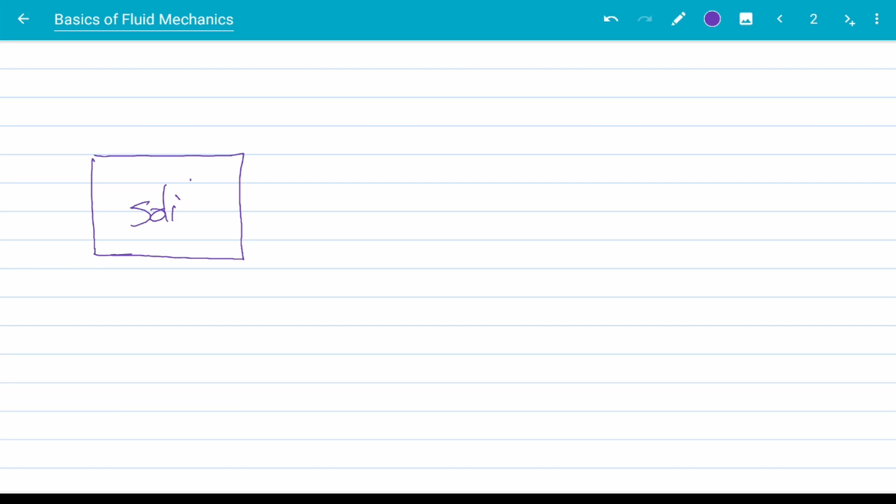Let me show that with a drawing here. So let's say this is an element of a solid, and this is another element, this time of a fluid. I'm going to apply the same shear stress on both of these two elements.

For the solid, obviously under the effects of this shear stress, we will experience some sort of deformation, right? So the solid element maybe changes to this red shape. After the deformation is done, the solid stops deforming any further and just stays like that, as long as tau, the shear stress we're applying on the solid, is smaller than the yield stress. The solid will not deform any further.

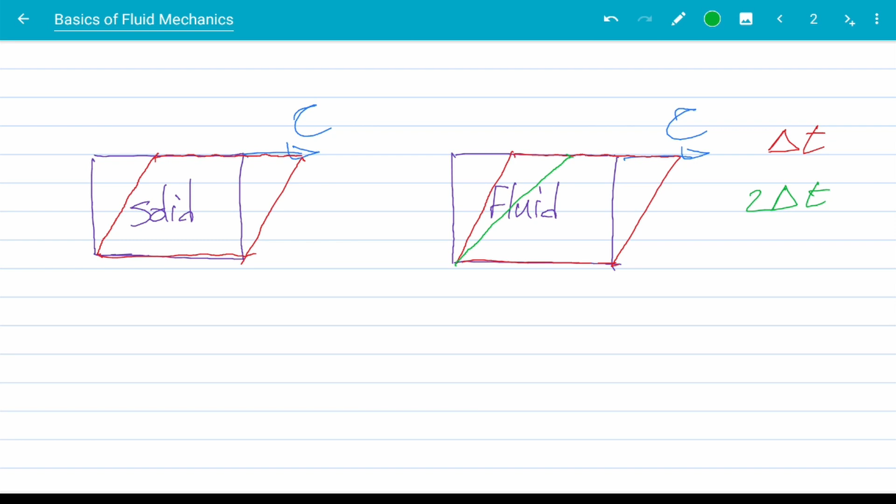However, for the fluid, that's not the case. Under any shear stress, no matter the magnitude, the deformation continues. What I mean is that after maybe a time interval of delta t, the fluid element deforms to this red element. After time passes about 2 delta t, deformation continues to this green shape. And after 3 delta t has passed, the deformation keeps continuing to the orange one.

So as you can see, the deformation continues under the effects of shear stress for the fluid, while for the solid, the deformation stops. This is the main difference between a solid and a fluid: fluid keeps deforming under shear stress, while solid does not. For this reason, solids are usually called elastic, while fluids are usually called viscous.

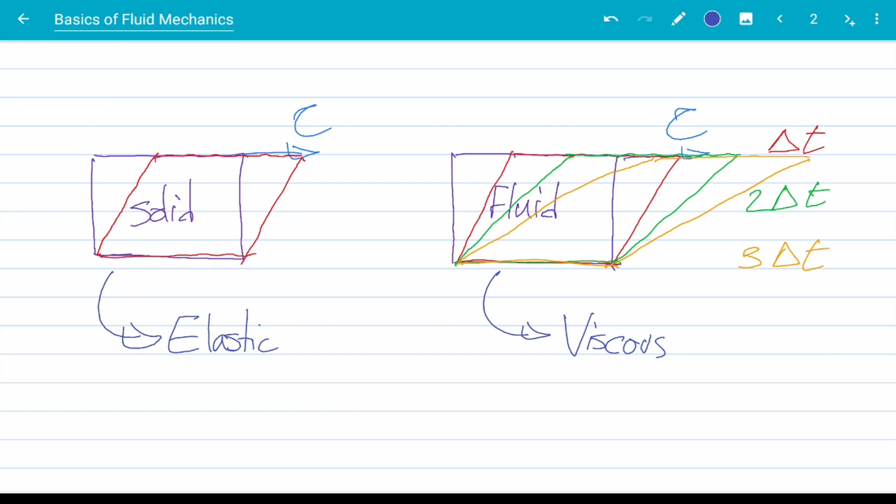Another major difference between solids and fluids is the way we treat them with different equations and concepts. For example, a very famous equation that governs the balance of forces on any object is Newton's second law: the sum of all forces in vector form is equal to the mass of the object times the acceleration vector. Applying this equation on a solid is relatively straightforward, and that is what we do in subjects like dynamics and the design of machineries.

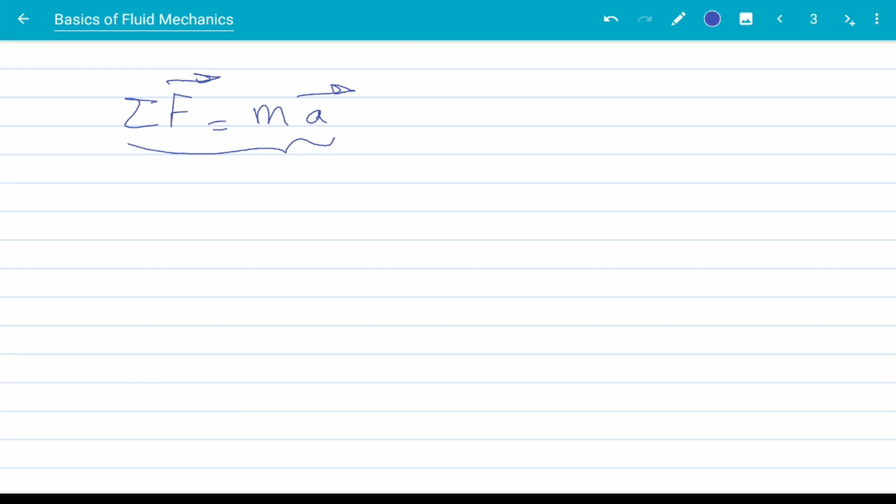However, applying this equation in this form on fluid particles is actually impossible. If you think about it, when you have a flow, let's say inside a pipe, there are numerous fluid particles moving through this pipe. So if you want to apply Newton's second law on each individual particle, you will end up with a very complex system of equations. In order to bypass this issue, we are going to change the way we apply this equation in fluid mechanics.

Instead of following each particle individually using Newton's second law, we are going to set aside a defined geometry in space, like this green rectangle that I'm drawing here. We call this a control volume. We are not concerned with the motion of individual particles; we are concerned with the motion of the flow inside the green rectangle. So this is a new approach.

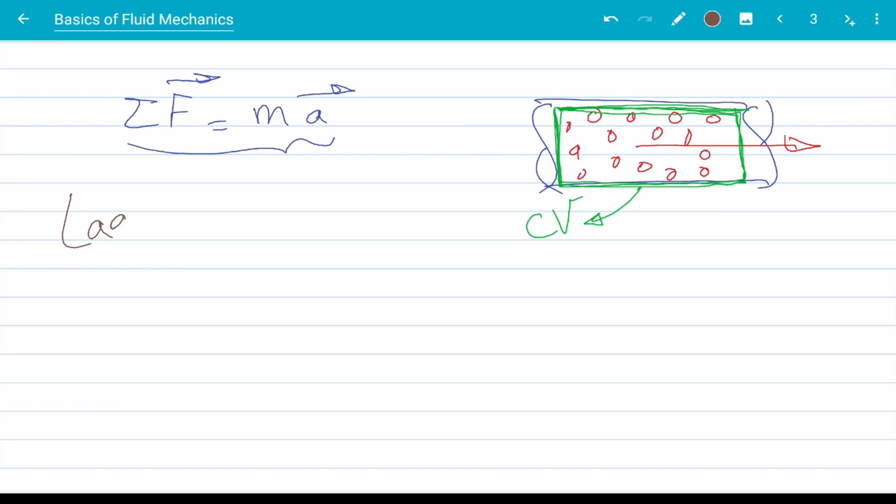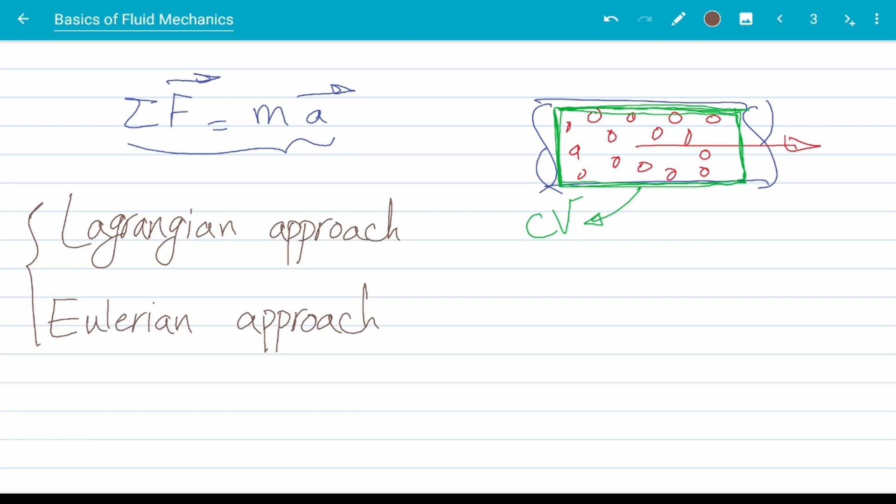The other approach, following the motion of individual particles, the approach generally used in solid mechanics, is usually referred to as the Lagrangian approach. The new approach for fluid mechanics, where we are concerned about the motion inside a defined geometry in space, is usually referred to as the Eulerian approach. We are going to discuss the Eulerian approach in future videos. For now, I just wanted to introduce the concept and the difference between Lagrangian and Eulerian approaches.

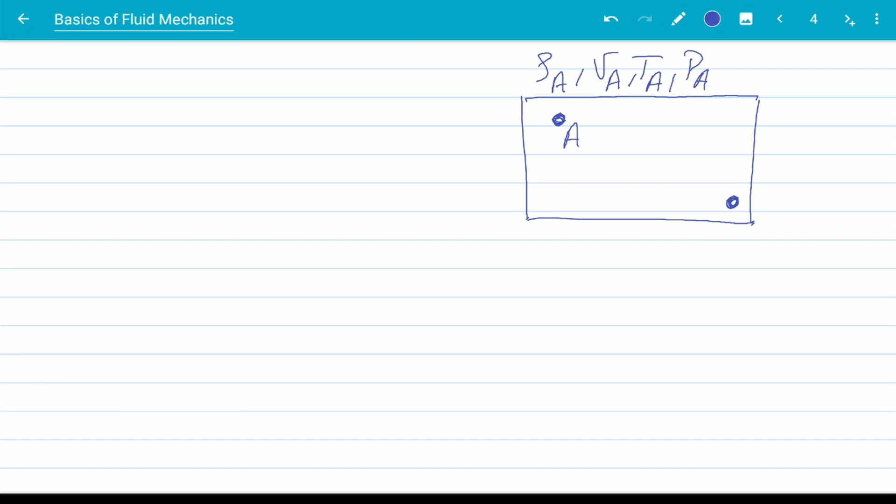Now, in a control volume, generally speaking, flow and fluid properties can be different at different locations. For example, at this location, let's call it point A, we will have the density, velocity, temperature, and pressure of point A. And at another point in the same control volume, let's call it point B, we may have density, velocity, temperature, and pressure that are different from point A.

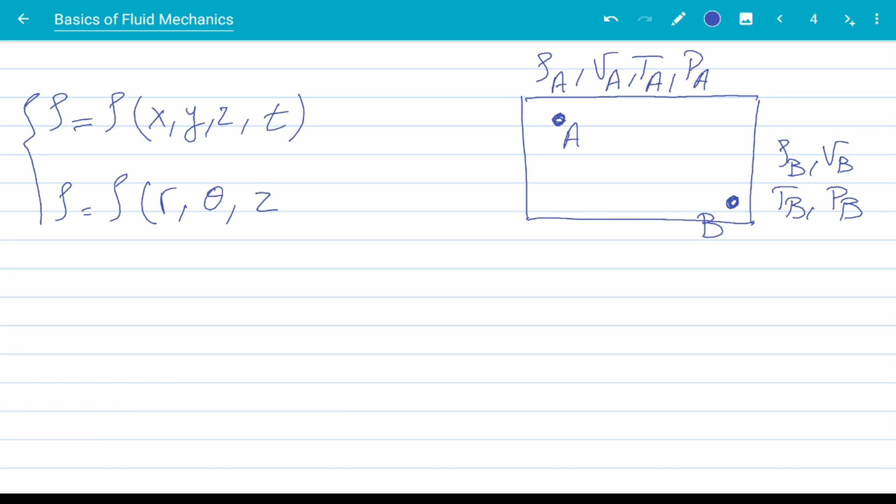So generally speaking, the flow properties can be a function of location as well as time. For example, the density of the fluid is a function of x, y, z, and time, where x, y, z represent the 3 dimensions in a Cartesian coordinate system. If you are using a cylindrical coordinate system instead, then density is a function of r, theta, z, and time.

Now that I mentioned density, let's talk about it. Density is defined as mass per volume. The unit for density in SI units is kilogram per meters cubed. In British Imperial units, it is pounds per cubic feet.

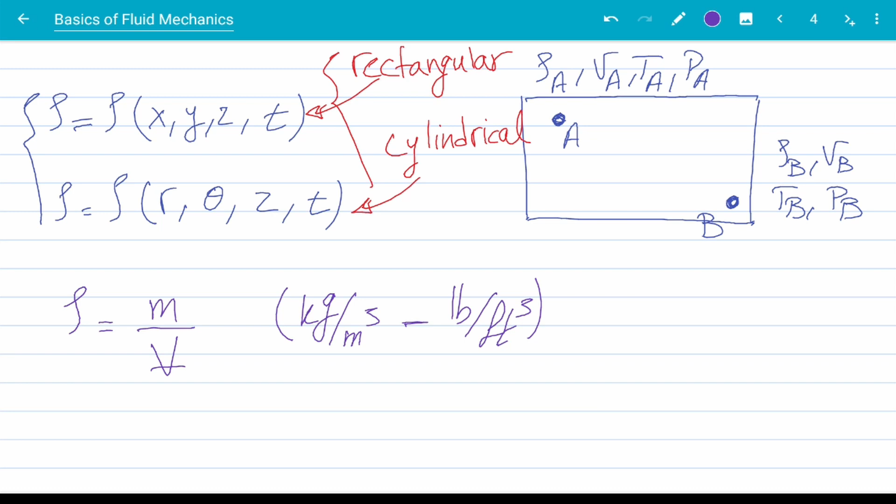There is a traditional way of representing density of different fluids and materials in general, and that is showing the density based on the density of water. It is called the specific gravity, and we show it with SG. It is the ratio of the density of the material that we are talking about over the density of water.

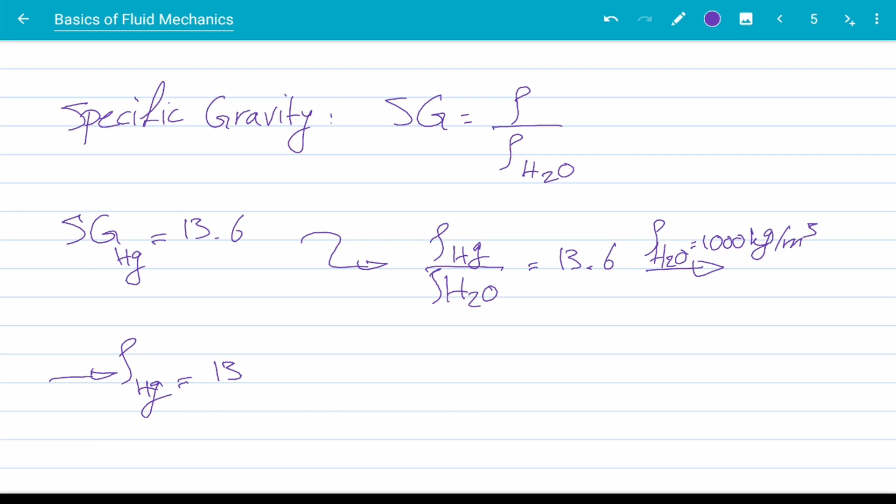So, for example, SG of mercury is 13.6. What it means is that density of mercury over density of water is 13.6. Now, in standard conditions, room temperature and pressure of 1 atmosphere, the density of water is 1,000 kilograms per meters cube. That means density of mercury is 13,600 kilograms per meters cube. That's how you use specific gravity.

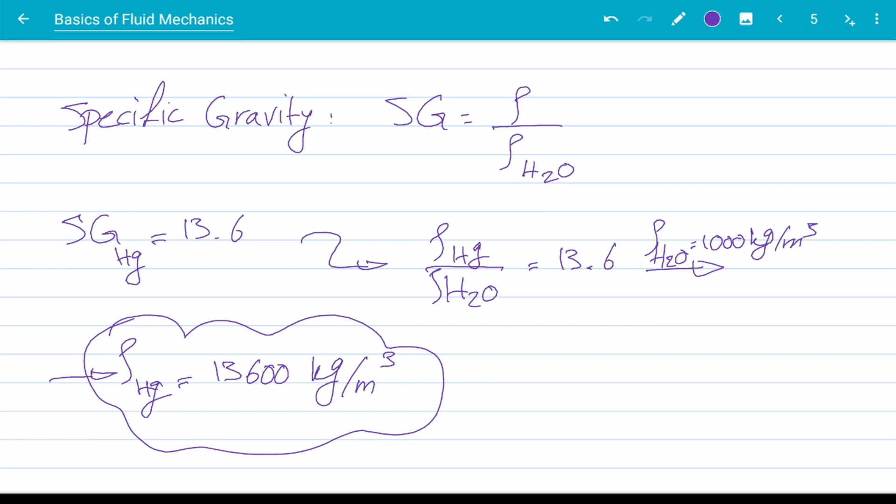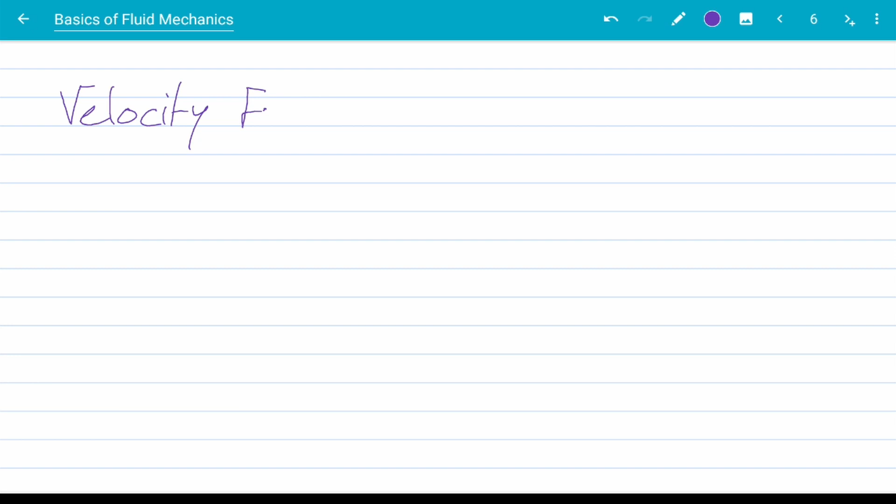Now, after density, the other flow property that is very important is the velocity. So we need to define the velocity field. Now again, just like density, velocity in general is a function of x, y, z, and time. Now, please take note that unlike density, that was a scalar, velocity is a vector.

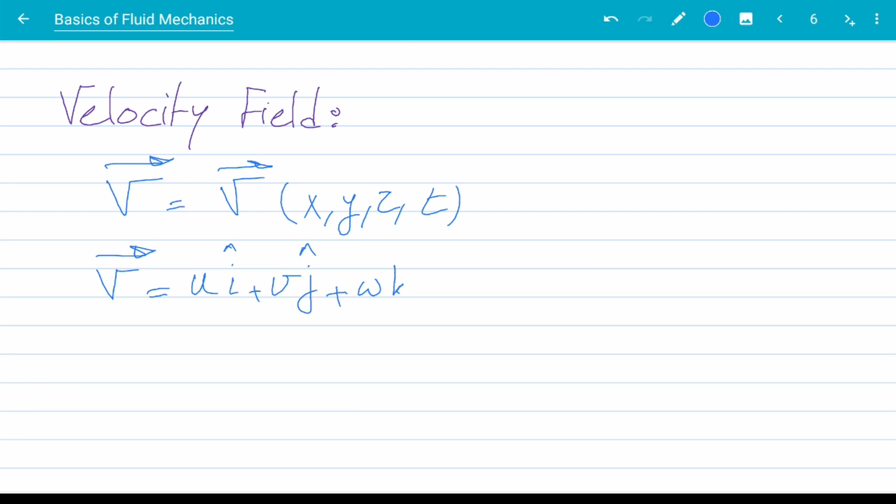Now, when dealing with vectors, it is immediately known that we can write down the vector in its component form. So, for a rectangular coordinate system, I can write down the velocity vector in the form of its i, j, and k components. So I will have u, i, plus small letter v, j, plus small letter w, k. Now i, j, and k in this equation represent the unit vectors along x, y, and z axis.

And small letter u, small letter v, and small letter w represent components of the velocity in x, y, and z directions. Now, using u for the velocity component in x direction, v in y direction, and w in z direction is kind of like a general universal agreement in all of the fluid mechanics textbooks. So everywhere you go, when you see u, you can be certain that u is along the x-axis. Small letter v is always the velocity component along the y-axis, and w is the velocity component in the z direction.

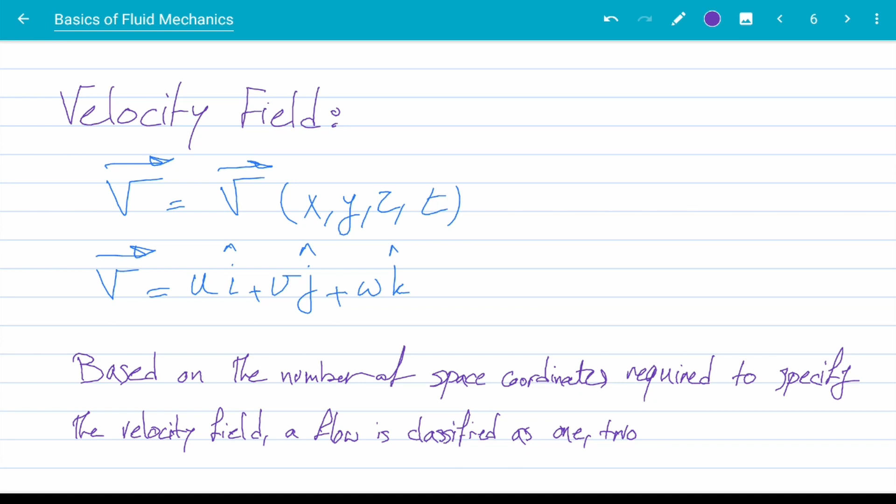Now, based on the number of space coordinates required to specify the velocity field, a flow is classified as 1, 2, or 3-dimensional. Now, generally speaking, all flows are 3D, right? But analysis based on fewer dimensions is always appreciated, okay?

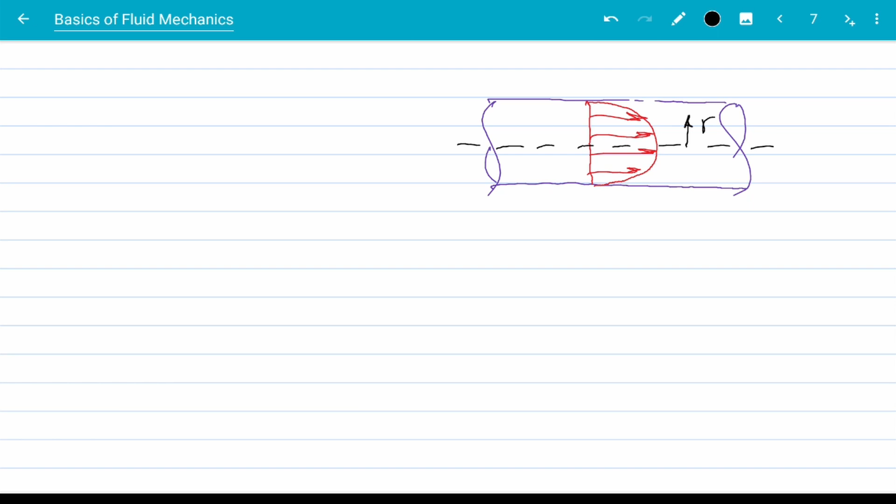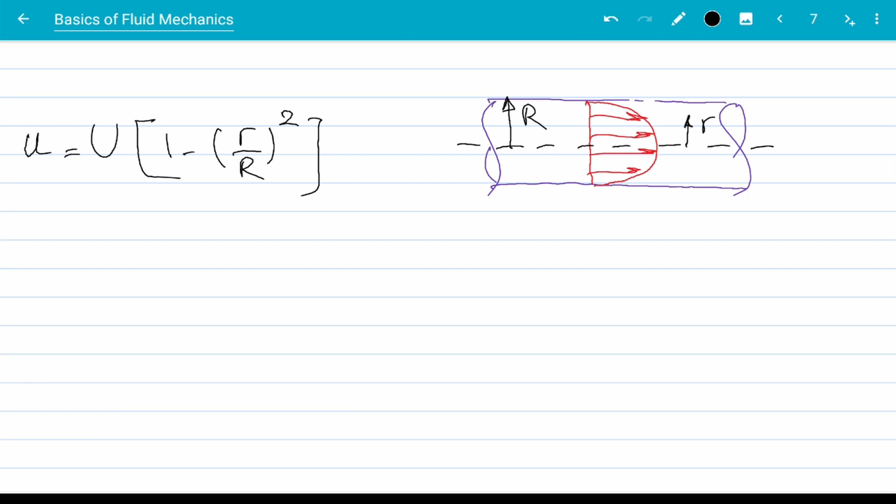Now, if we are using the cylindrical coordinate system and this direction is the r direction and the radius of the pipe is capital letter R, then the velocity is defined as capital letter U times 1 minus small letter r over capital letter R squared. Now, in this equation, the capital letter U is just a constant. Capital letter R is the radius of the pipe, so it's constant as well. The only variable here is small letter r.

So I can conclude that u is a function of r only. So my velocity component, my velocity profile, has only one space coordinate. I only need one space coordinate, r, to define the velocity field. This means that this flow field is one-dimensional.

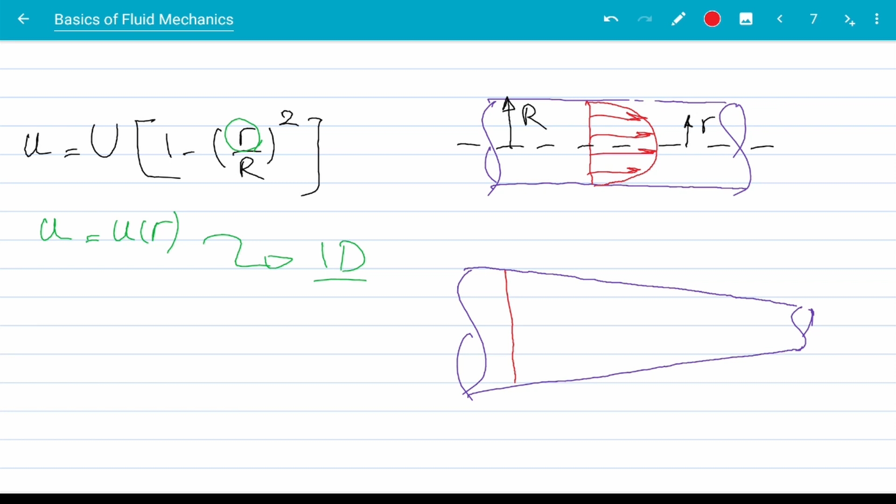Now let's assume another situation where we are dealing with a pipe. However, the cross-section of the pipe is shrinking, more like a cone. So the velocity profile at the beginning of this cone looks like this. And the velocity profile near the end of the cone looks like this. As you can see, the velocity profile has changed in the x direction as well as r direction.

Again, we are using the cylindrical coordinate system. This direction is r, this direction is x. I can see that u is a function of r, obviously, as you move in the r direction from the center line to the edges of this pipe, the velocity profile changes. So it's a function of r.

And also, it is a function of x as well, because it is kind of obvious here. At the entrance of this cone, the velocity profile is kind of broad and wide. And as you go closer near the tip of the cone, the velocity profile is shrinking.

So velocity field is a function of x as well, which means this flow is two-dimensional. Take note that in these two examples, we are dealing with a velocity field that has only one velocity component, namely the velocity in the x direction. That's why we call it u. We are not dealing with v or w. These flows do not have v or w components.

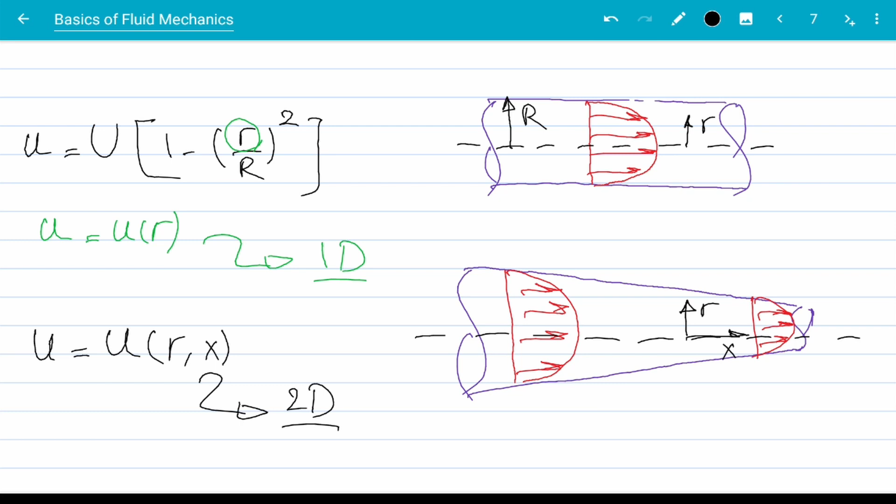However, especially for the bottom example, because that single velocity component is a function of r and x, it is at the same time a two-dimensional flow, despite the fact that only one velocity component is present. So when trying to define the dimension of a velocity field, don't concentrate on the number of velocity components, concentrate on the number of space coordinates that are required to define your velocity field.

Now we talked about the dependency on space coordinates, but what about the dependency on time? As mentioned for the definition of density and velocity, both of these are, generally speaking, functions of space coordinates as well as time. Again, in general, every flow property - I'll just use x here to show that it can be any flow property - is a function of x, y, z, and time, generally speaking.

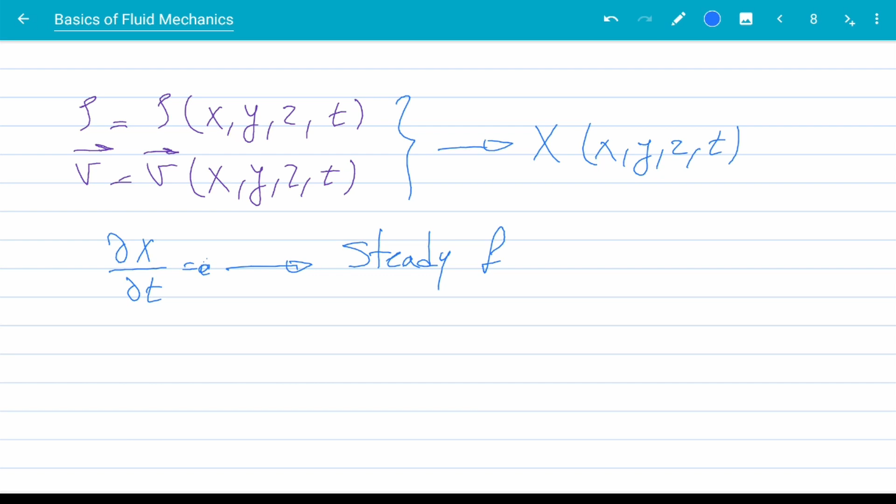Now, if the flow properties are not changing with time, or in other words, mathematically speaking, the derivative of the flow property with respect to time is 0, then I can conclude that the flow is independent of time, or in other words, is steady. If, however, the flow properties are changing with time, we can conclude that the flow is unsteady, sometimes referred to as transient.

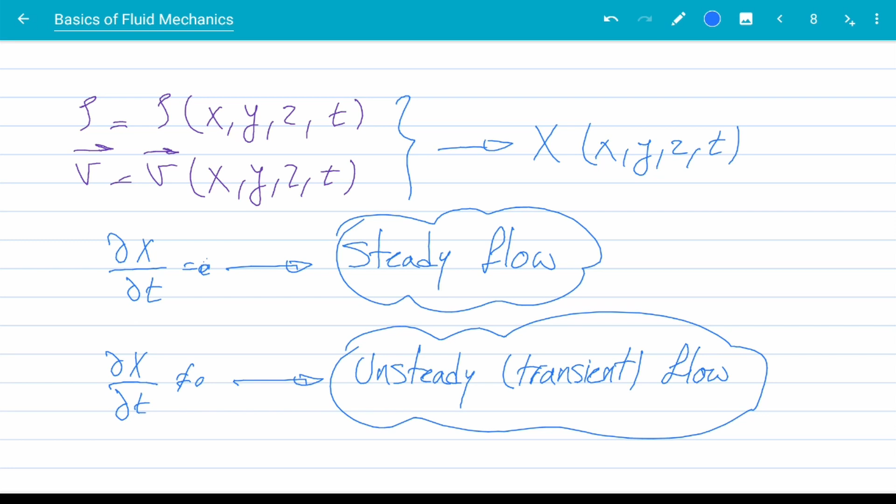The dependency on time and spatial coordinates are independent from each other. We can have a scenario where velocity is a function of x and time, a scenario where velocity is a function of time only, or a scenario where velocity is a function of spatial coordinates alone and not time. So there is no correlation between the dependency on time and spatial coordinates. They are independent from each other, independent variables, and they don't affect each other.

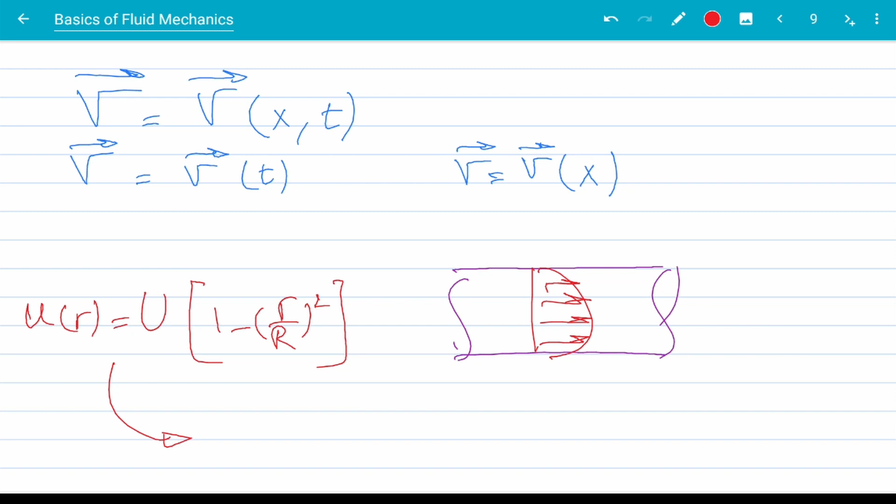So in the previous example that we had, the flow in the pipe, I presented this equation as the velocity inside the pipe. As you can see, there is no time involved in this function. Obviously, you can conclude that the velocity inside the pipe governed by this equation is a steady flow, meaning that flow properties are not affected by time.

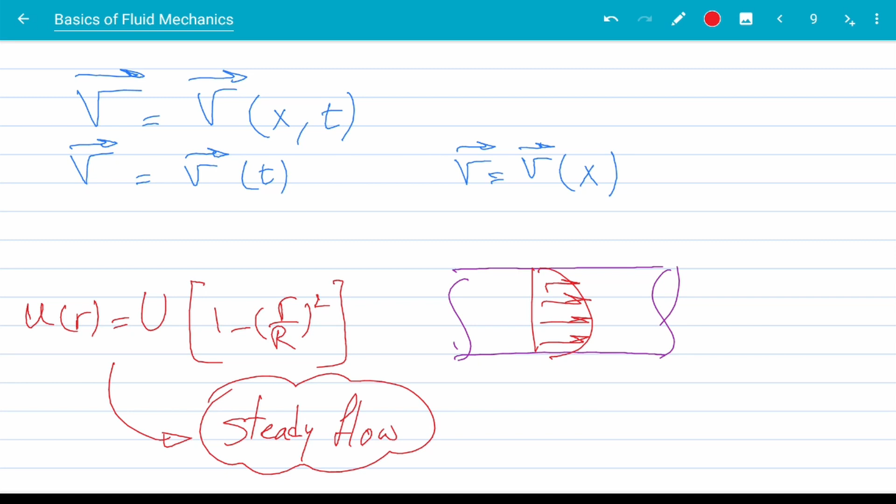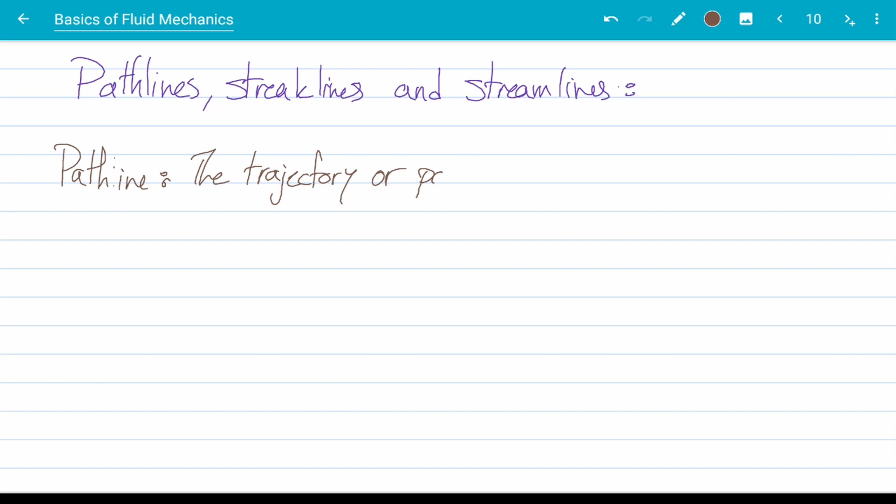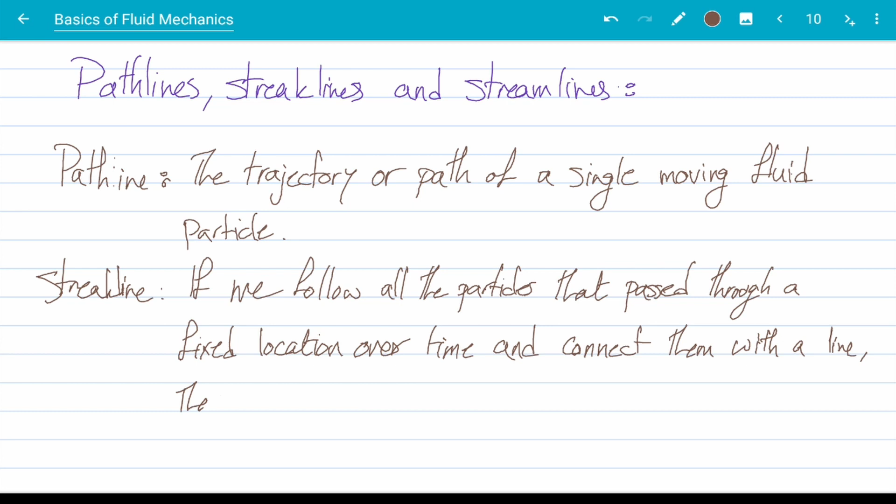Now we can talk about our next topic: path lines, streak lines, and streamlines. A path line is the trajectory or path of a single moving fluid particle. If we follow all the particles that pass through a fixed location over a certain time frame, and then connect these together, the line that we get is called a streak line. Finally, a streamline is a tangent line to the direction of the flow at every point in the flow field at any given time.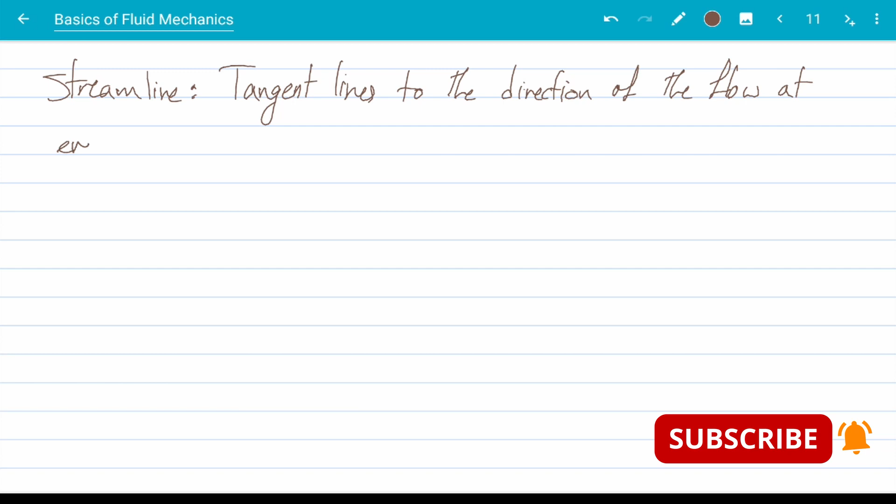Now, the video here shows a path line, streak line, and streamline at the same time. This is a transient flow. We can think of it as the wind blowing initially towards the east, or the right-hand side of the x-axis, and over time it gradually shifts its direction towards the north. So at the end of this animation, the direction of the wind is towards the northeast.

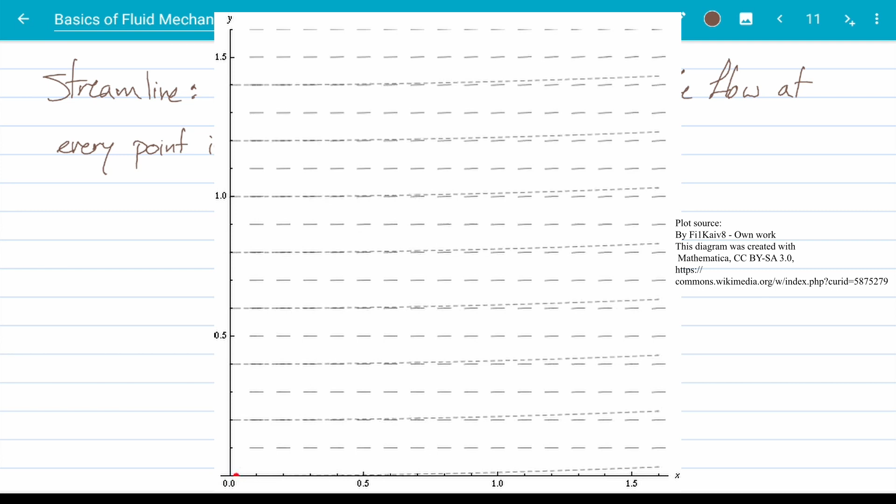Now imagine that at the center of this coordinate system we have a pile of particles - think of them as maybe tree leaves on the street. We are going to gradually release these particles into the flow, and we have attached a GPS to each so that we can track them in the wind. The red line here is the path of a single particle, or leaf. It initially starts to move towards the right, and gradually as the wind shifts direction, it also shifts direction towards the north, going through a curvature. So the red line is a path line because it's following a single leaf.

Now, we are gradually releasing all the leaves into this wind. At any given time during this video, if we pause and connect the GPS locations of all these particles together, we get the blue line. So the blue line here is the streak line. It shows the location of all the particles that originated from the center of this coordinate system inside this flow field. As you can see, the blue line is not following the red line, because generally speaking, streak lines and path lines are not the same.

The gray dashed lines in this video represent the streamlines. They are always tangent to the direction of the velocity of the flow. This is a transient flow, so initially they are all parallel with the x-axis, meaning the flow is going right, or the wind is blowing east. Over time, they start to shift direction towards northeast. At any given time, these dashed lines show you the tangent lines, or streamlines, inside our velocity field.

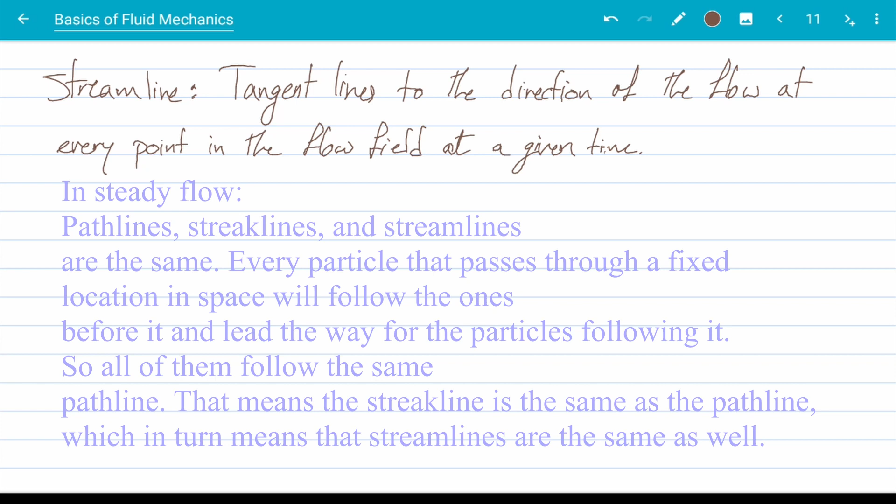Because if the flow is steady and there is no change with time, a single particle that originates from any point in space will go through the same path as any other particle that originated from the same location. There is no change with respect to time, so all particles will follow each other and go through the same path line. If you connect them at any given time, the streak line will also fall on the path line. And because this is a steady flow, not dependent on time, the streamlines also fall on the path line. So all three are the same.

So to summarize, in a steady flow, the path line, streak line, and streamline are the same. In an unsteady flow, they are different.

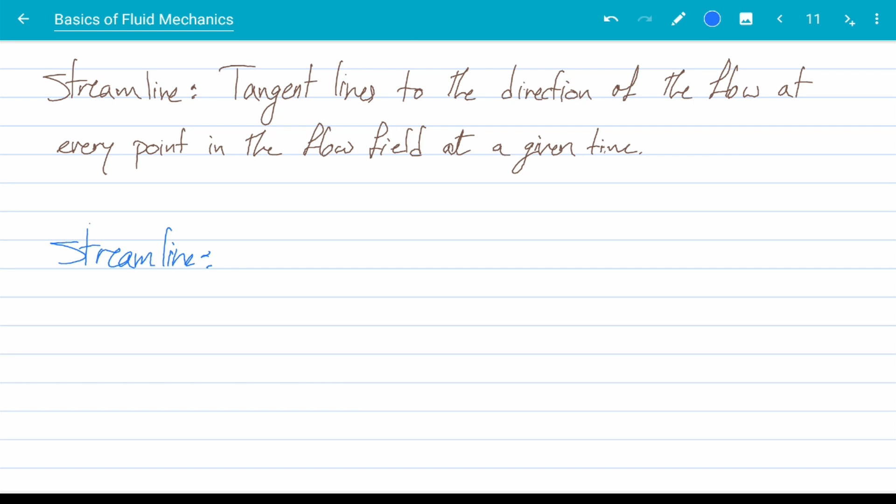By the definition of a streamline, we are looking for a tangent line that is always tangent to the direction of the flow in a velocity field. So let's see what we can do with that definition. Let's say we have a flow field, and at a point inside my velocity field I have this velocity vector. Now let's see if we can find a tangent line to this vector. Let's say this is the line we are looking for. I want to find a mathematical equation for this green line.

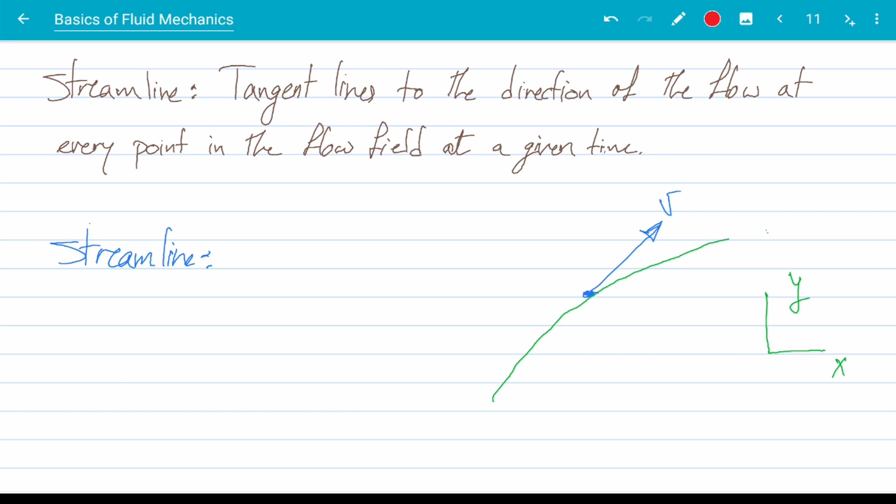I'm using the rectangular coordinate system, x and y. So basically what I want to do is find the slope of this blue vector. I have two ways of achieving that. First, I can break this vector into its components, u and v. Finding the slope means finding this angle here, let's call it alpha. So the tangent of alpha is v over u.

Now, if you take a look at the green line, and I ask you, if this green line has a function y equals y of x, tell me what the slope is at this blue point, what would you do? You would say that the tangent of alpha, or the slope there, is dy over dx. Now I have two definitions for the tangent of the same angle. I can equate them: dy over dx equals v over u. I can rearrange this equation and say dy over v is equal to dx over u. This equation relates the velocity components u and v to the streamline.

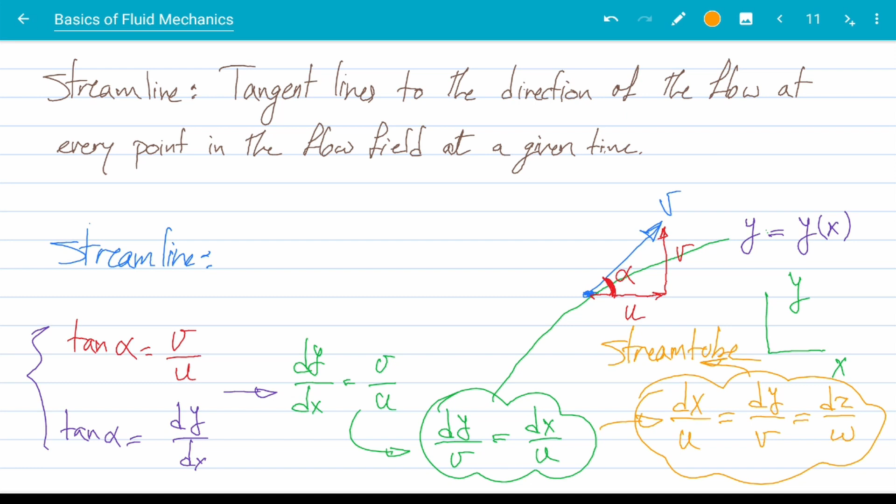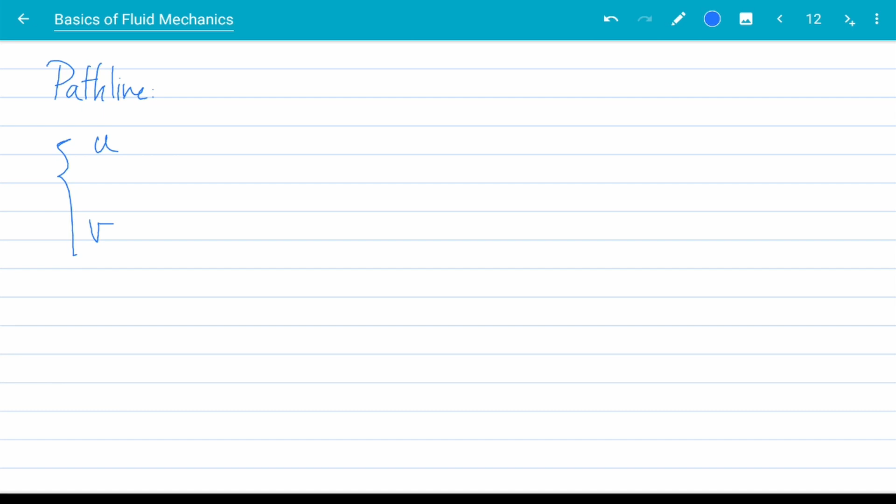We can do a little mathematical analysis for the path line as well. The path line, by definition, is the trajectory of a single particle. So I can say the velocity of the single particle has two components, u and v, since we're talking two dimensions here. By definition, u is the derivative of x with respect to time, and v is the derivative of y with respect to time. So playing with both of these equations, I can express x as a general function of time, the x of the particle.

This is a Lagrangian approach because we are following a single particle now. X as a function of time is the integral of u dt from the start of the motion up to t star, which is the time that we are interested in. Same thing goes for y: y as a function of t is the integral from the initial time to t star of v dt.

Now again, finding the path line, these two integral equations are the ones that we generally use to find a path line of a single particle. And again, these are the equations that CFD post-processing softwares, like Tecplot, usually use to generate a path line.

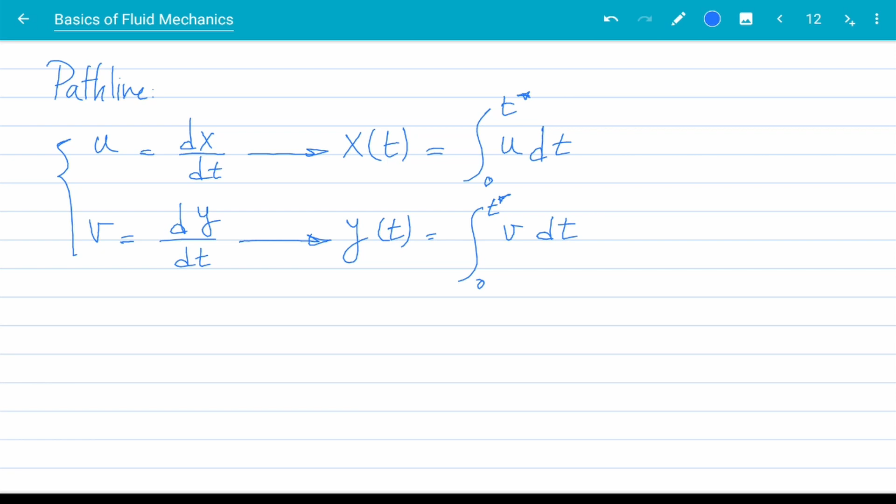Now, streak line, on the other hand, because of its definition, is very easy to visualize using a wind tunnel and using smoke or dye, injecting some dye into the fluid. As I said, it's very easy to visualize. However, it's more tricky to actually find an equation analytically, so I'm not even trying to do that right now. Path line and streamline in equation form are enough for now.

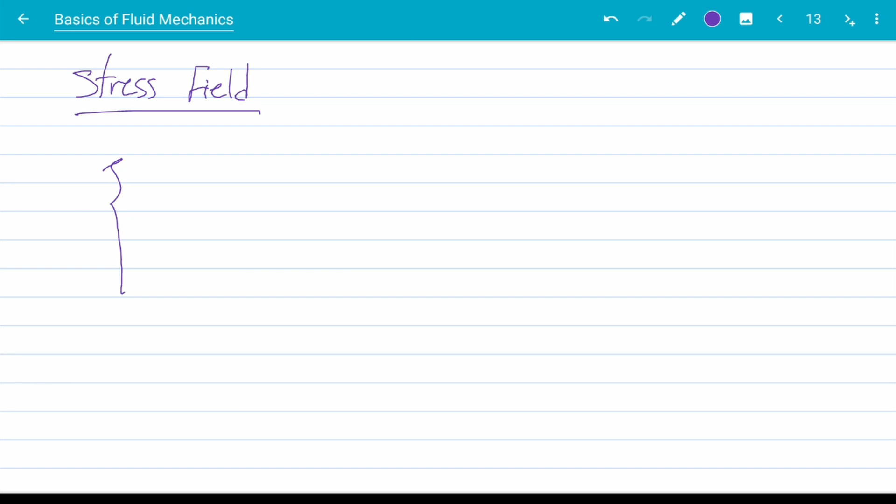All right, so now we can talk about the stress field. When analyzing a fluid flow, we really need to know the different forces acting on our fluid. Generally speaking, the forces acting on a fluid element or a fluid particle can be categorized into two main groups: surface forces and body forces.

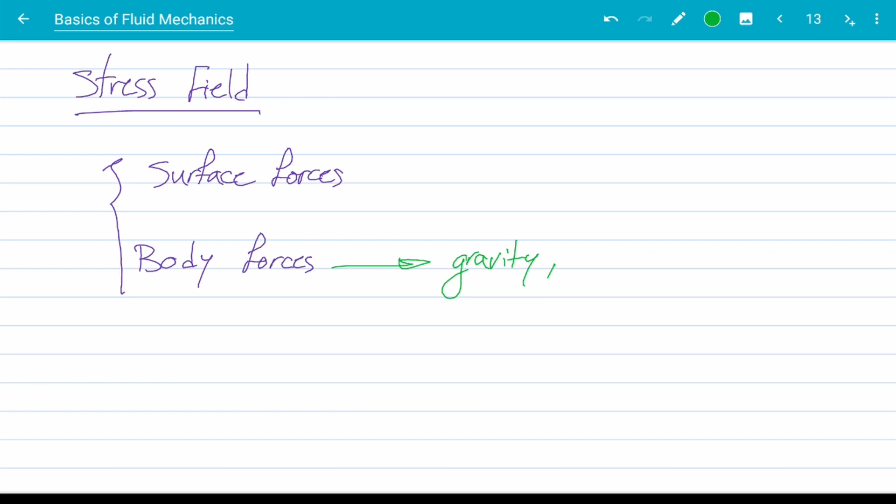Body forces are the ones that affect the bulk or the mass or the volume of a particle, like gravity. Or, if your fluid has electromagnetic properties, applying an electric or a magnetic field on the flow will generate some sort of body forces. So gravity and electromagnetic forces. Keep in mind that in classic fluid mechanics, the applications we usually encounter in general engineering, we are usually dealing with gravity. Electromagnetic is rare, but it depends on your problem. If your flow has electromagnetic properties and there is an electric or magnetic field present, you have to consider that.

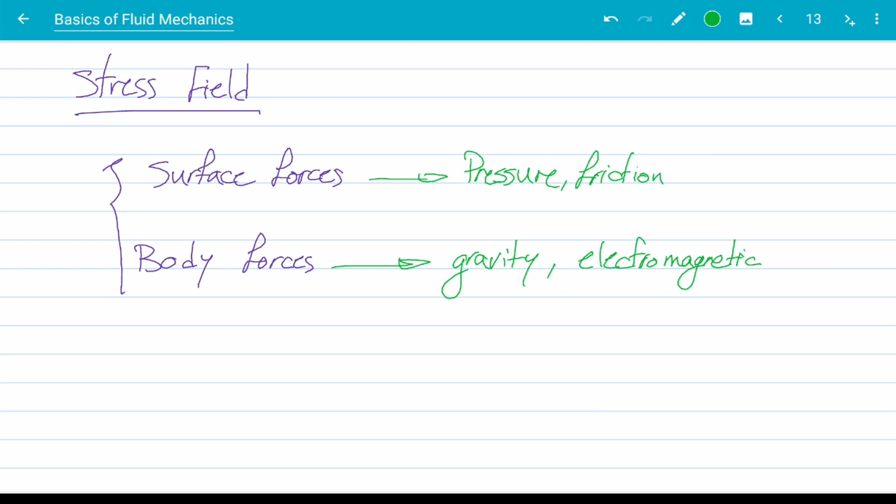Now, anything other than body forces falls into the surface forces category—things like pressure or friction. Any other type of force imaginable that is not a body force is categorized as a surface force. So surface forces lead to stress. This part is just like solid mechanics: when you have a solid element or particle and apply different surface forces on it, depending on the direction of the force, it causes either a normal stress or a shear stress. The same thing happens here in fluid mechanics as well.

So let's take a look. Let's say this is the surface of a fluid or solid particle, and we're interested in this blue element here, which I'll call S. This is just an area. Now, area, generally speaking, is a vector, so I'm going to show S as a vector. It has a unit vector, which I'll show with N, meaning that it's normal to the surface we're interested in. The area's unit vector is always perpendicular to the surface of interest, and always pointing outward from the element.

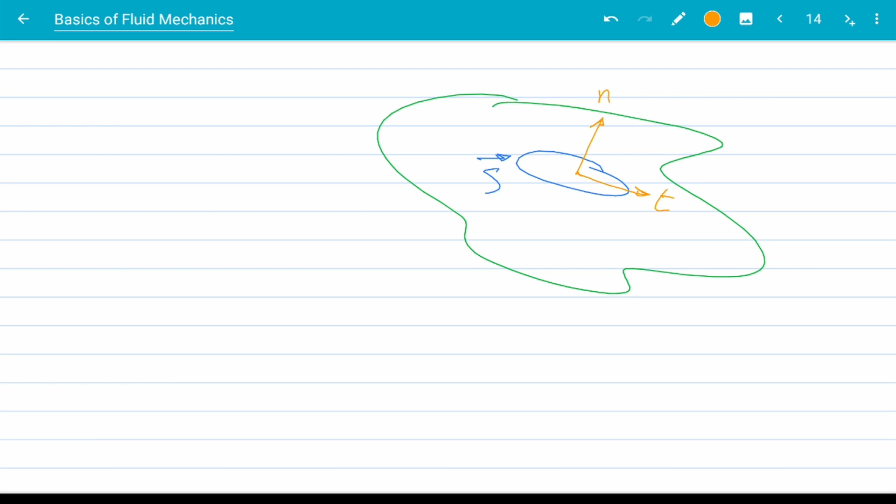For example, if this blue surface we're discussing is on top of the fluid particle, then the orange N is pointing outward. Now, there is an orthogonal vector in the direction of the surface itself, which we show with T. So based on this vector representation, I can say that vector S is S times N, where S is the scalar magnitude of the area, and N represents the normal vector of the surface.

A general surface force vector can be something like this—let's say this is the surface force acting on my element S. I can break this force into N and T components, right? So let's do it: this will be the component in the N direction, and this will be the component in the T direction.

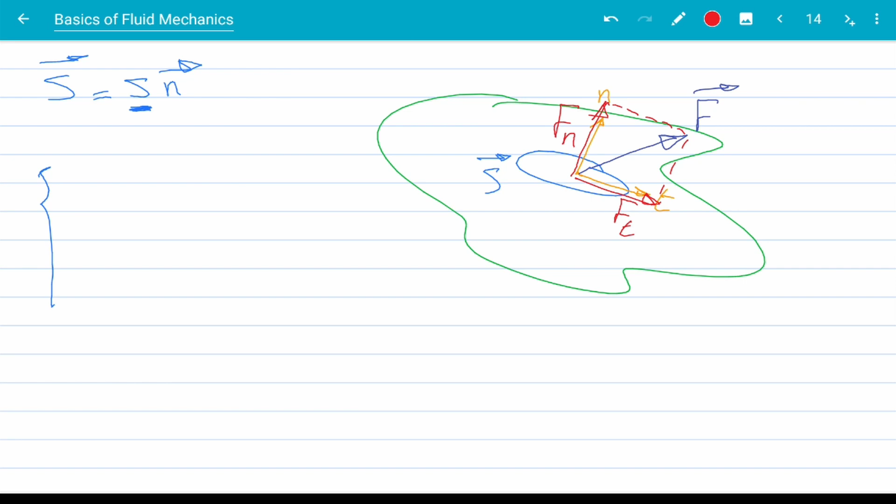Now, based on the definition of normal and shear stress, I can say the normal stress, which we usually show with the Greek letter sigma, in the N direction is Fn over S, the magnitude of the area. And the shear stress, shown with the Greek letter tau, is in the T direction, and it's the force component in the T direction over the area S. Now, the N and T vectors here are not good enough for us.

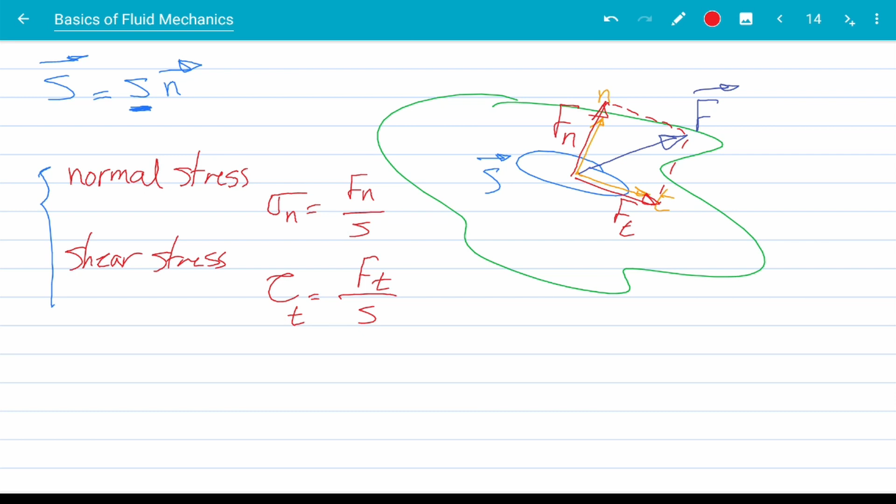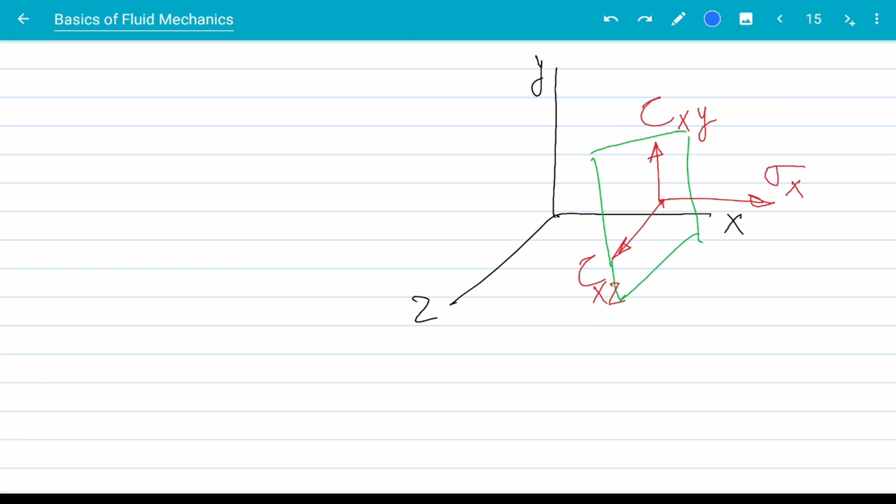Now, sigma t in the previous page was tangential to the surface. We can break that into a y and z component here. I will have one shear stress component in this direction and one in this direction. I'm going to label the top shear stress tau xy and the bottom shear stress tau xz. The naming convention is that the first subscript shows the axis that is normal to that plane. In this example, the x-axis is the normal vector of this green plane, so x comes in as the first subscript. The second subscript is the direction of the shear stress. For the top one, the red arrow is in the direction of the y-axis, so this becomes tau xy. For the bottom one, it's parallel to the z-axis, so it becomes tau xz. This is the naming convention we'll use for different shear stresses on a single particle or element.

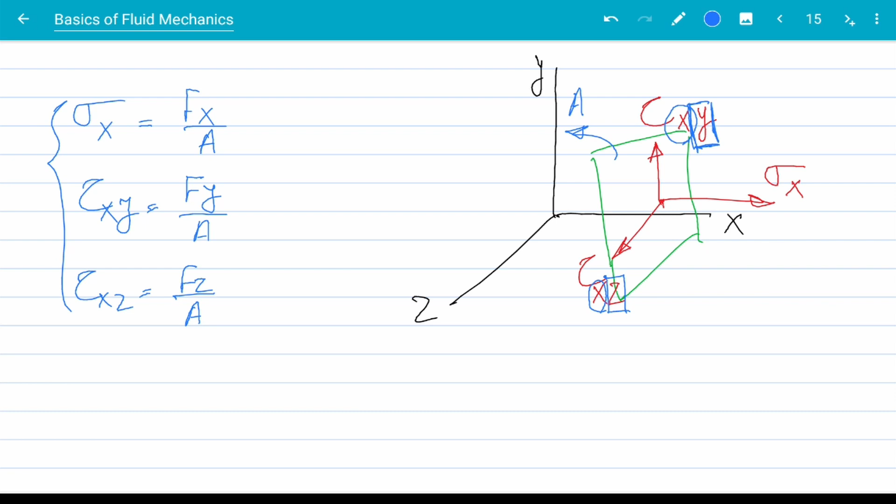Now, if you want to put an equation for these shear stresses, you can say sigma x is fx over the area. Let's say the area of this green plane is just A. Tau xy is fy over A, and tau xz is fz over A. Fx, Fy, and Fz are the three components of the surface force F acting on this particle. Let's say this is F, and so it will have an Fx component here, an Fy component like this, and an Fz component like this.

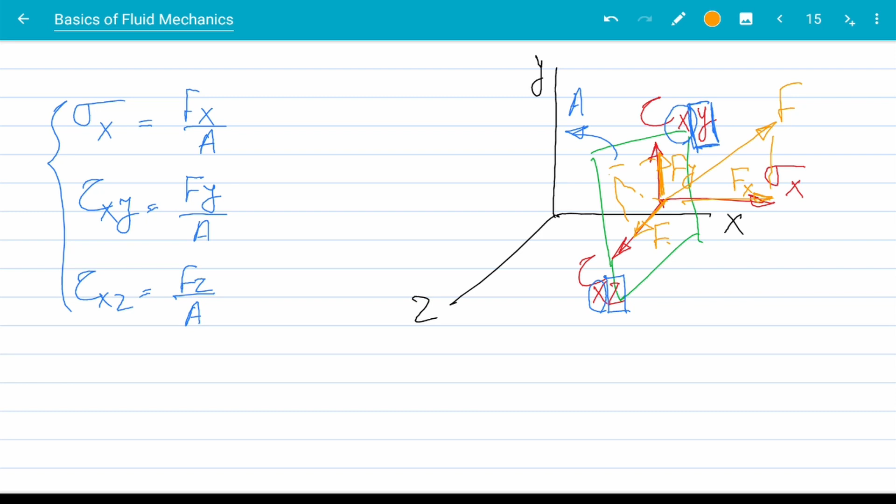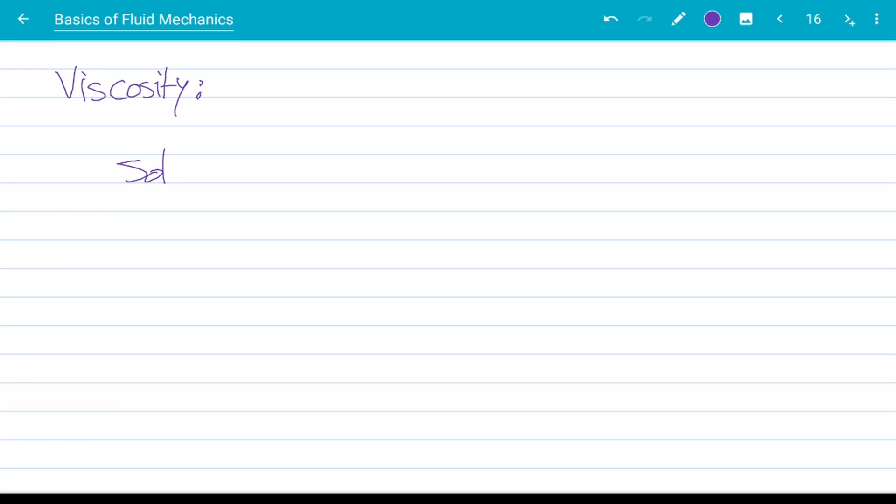Now we can talk about viscosity. At the beginning of this video, when I was talking about the difference between a solid and a fluid, I said that under a certain shear stress value, a solid goes through a deformation while the fluid will continue to deform. For a solid, we know that deformation, that strain, causes the stress. For example, for the solid, the stress is related to the strain through the Young modulus. Here, sigma is the stress, epsilon is the strain, and capital E is the Young modulus. For the fluid, however, this deformation is continuous, so I don't have a value for the deformation in the form of strain to relate the shear stress to the strain. So we are going to relate the stress to the rate of deformation.

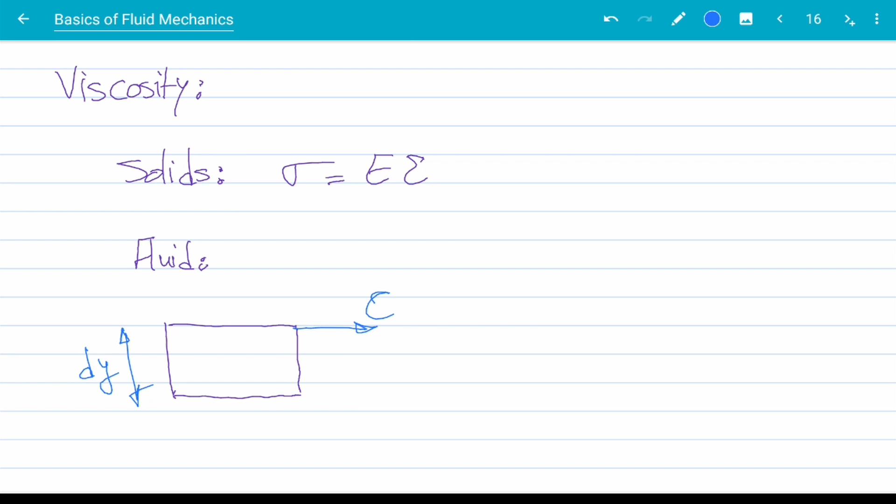Let's take a look. For the fluid, let's say I have this fluid element, and I am going to apply shear stress on top of it, shear stress tau. Now this fluid element is very small, its side is dy. Over a time frame of dt, it has gone through this deformation, this red deformation. I know the deformation is continuous, so I had to constrain it by choosing a finite dt. Over the time dt, this fluid element has deformed from the purple rectangle to the red shape. Now, I'm going to say that the angle created here is alpha, and the rate of deformation of this fluid element is related to it.

Rate of deformation is actually d alpha over dt. Now remember, we want to relate the shear stress to the rate of deformation. I want to find a relation between tau, shear stress, and rate of deformation, d alpha over dt. So my goal is to relate tau to d alpha over dt. Let's see what we can do.

Now, this is the same element. Point A, which was here at t equal to 0, has moved to A prime after dt. I want to know how much A has displaced, so I have two ways of finding that. Way number one is using alpha and dy.

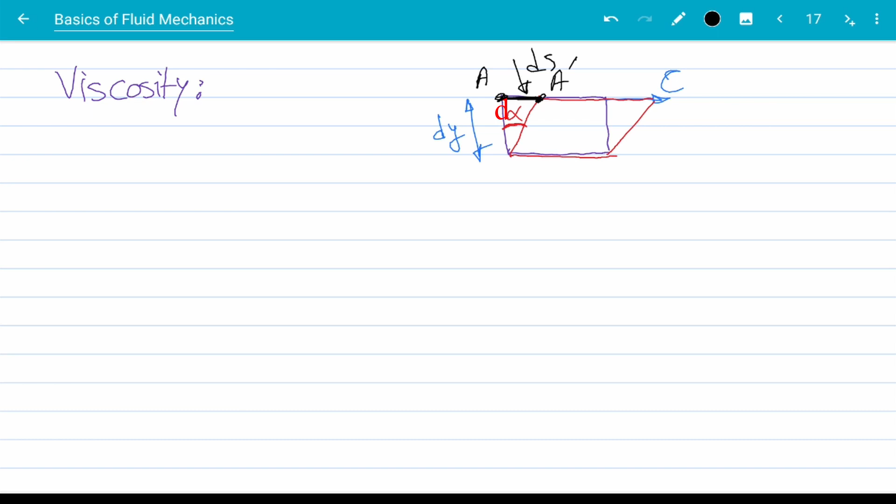Let's say this displacement is ds, so ds is d alpha dy. If the motion is small, if dt is sufficiently small, then this entire deformation is small enough that we can assume that AA prime has moved on an arc where the center is here, I'll call it O. You know that to find the length of an arc, you multiply the angle by the radius. Here, radius is dy and the angle is d alpha.

On the other hand, because of this shear stress, the top layer of this element is moving with a velocity du, so I can find ds using du. The corner of the element has moved from point A to point A prime with a velocity of du over a time frame of dt. So ds is du dt.

Now I have two equations for ds. I can equate them. This gives me d alpha dy is equal to du dt. Playing with this equation a bit, I get d alpha over dt equals du over dy. I knew that tau has a relation with rate of deformation d alpha dt, but d alpha over dt isn't good enough for me because it's not a flow property. However, du over dy is, and I found a relation between d alpha over dt and du over dy. So I use that.

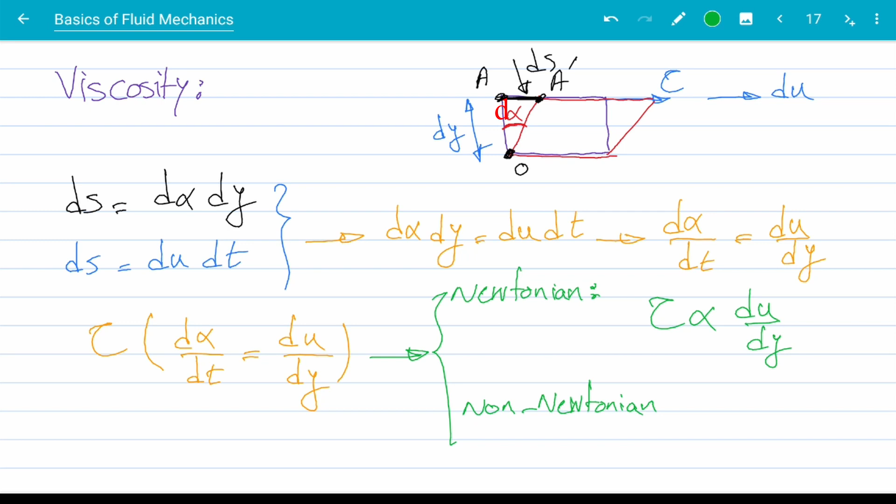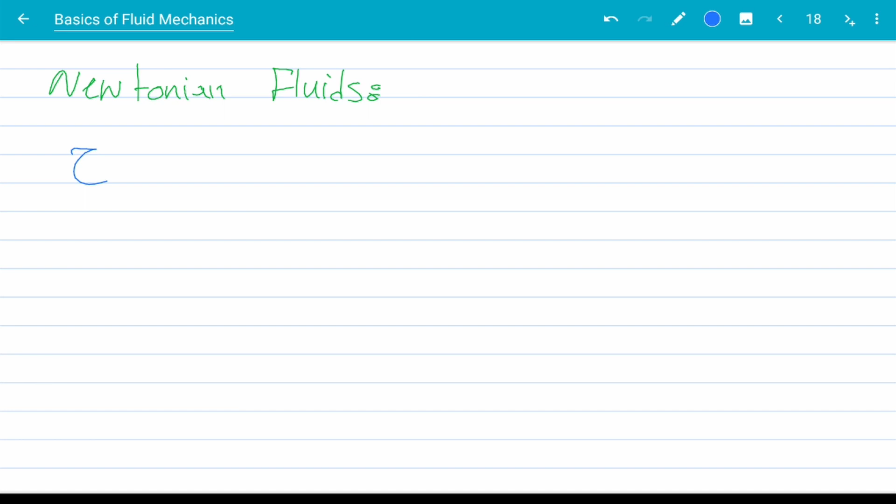Now here, we need to divide fluids into two main categories. Category 1 is called Newtonian fluids, and for Newtonian fluids, tau is linearly proportional to du over dy. For non-Newtonian fluids, the other group, this is not the case - tau is not linearly proportional to du over dy. So let's first focus on Newtonian fluids. Nearly all of the common fluids that we deal with, like water, oil, air, nitrogen, oxygen, any of these common gases and liquids, fall into the Newtonian fluids category. As I said, for Newtonian fluids, tau, or shear stress, is linearly proportional to du over dy.

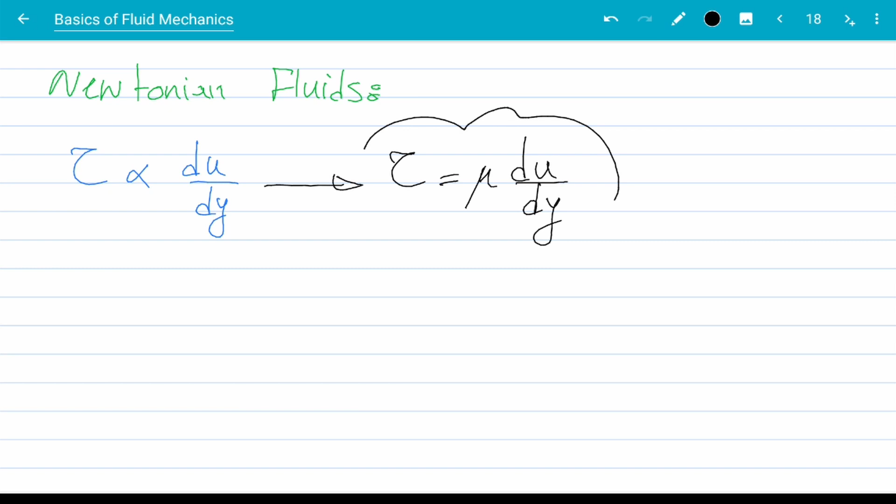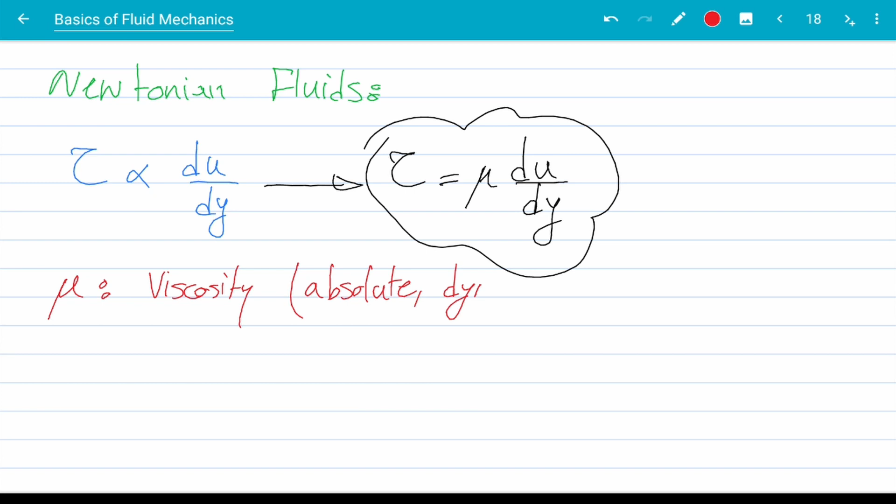Now, the coefficient that makes this proportional relation into an equation is called the viscosity. We say tau is viscosity times du over dy. Mu is called viscosity, sometimes we refer to it as absolute viscosity or dynamic viscosity. Its units in the SI system are Pascal seconds, or kilograms per meter second. We also have nu, which is mu, viscosity, over density, and we refer to it as kinematic viscosity. Its units are meters squared over seconds.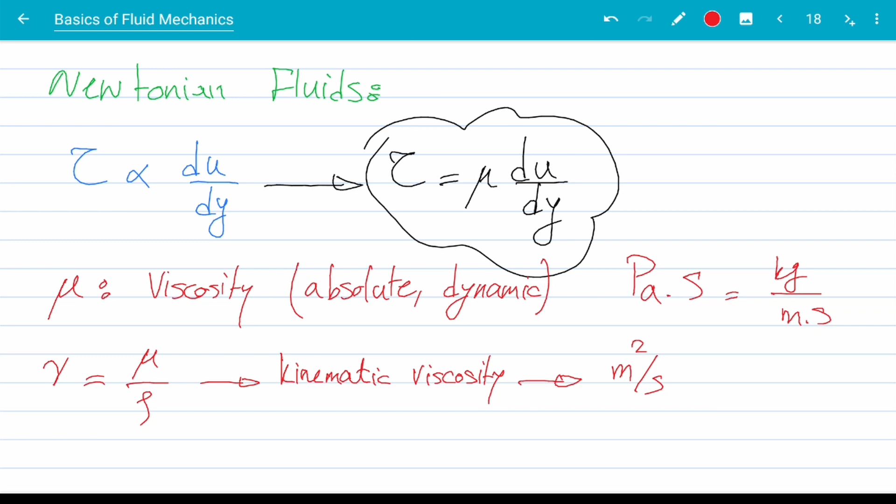Now, both absolute or dynamic viscosity and kinematic viscosity are commonly used in fluid mechanics. Mu and nu are properties of the fluid, and generally they are a function of temperature. If the changes in temperature are negligible, then we can assume that during the flow the viscosity of the fluid remains constant. Now, non-Newtonian fluids are different - here we don't have a linear relation between the shear stress and the rate of deformation. Based on how the shear stress behaves with respect to the rate of deformation, we will have different types of non-Newtonian fluids. Examples of non-Newtonian fluids are things like toothpaste, blood, paint, nail polish, stuff like that.

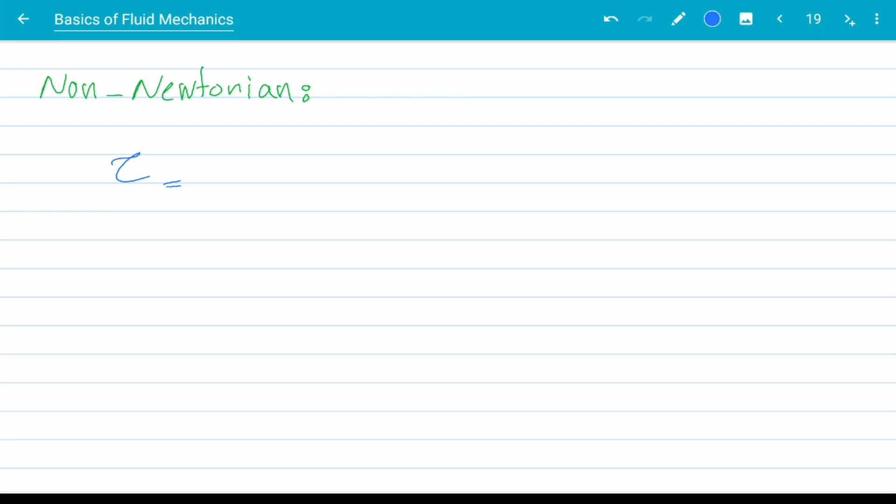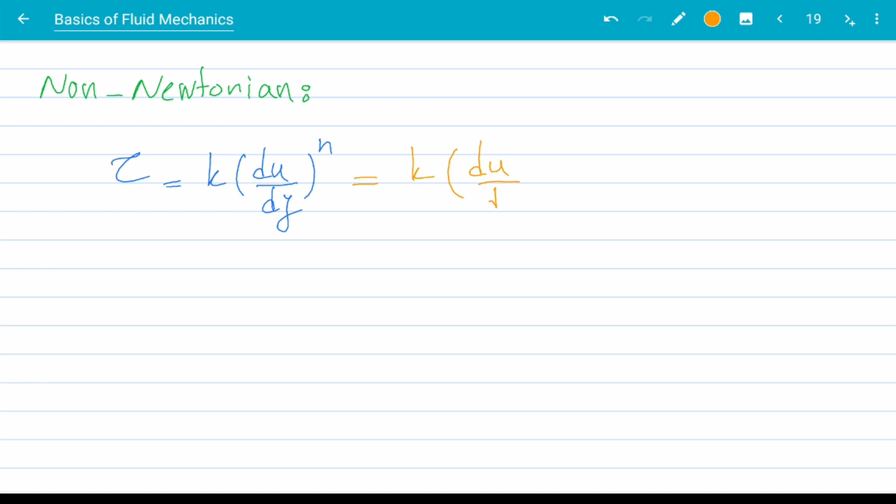Now, for a wide range of non-Newtonian fluids, we can use this equation to relate the shear stress to the rate of deformation: tau is equal to K times du over dy to the power of n. This is an empirical equation, meaning it's been derived using experimental data. However, this is not the form that's commonly used - we really want to format the equation as close to Newtonian fluids as possible. So we usually write it as K, du over dy to the power of n minus 1, times du dy, and then bundle these two terms together and call it eta, so tau is eta du dy.

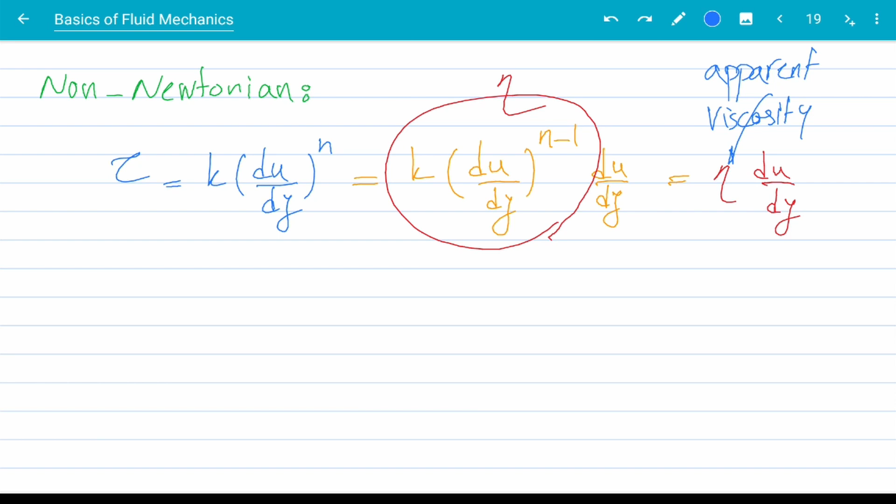Now, the reason for this is that Newtonian fluids have a linear relation between the shear stress and the rate of deformation. We really want our equation to be as close to that equation as possible, so we write it like this. However, unlike Newtonian fluids where mu is constant if temperature changes are negligible, eta here is not a constant - it is a function of rate of deformation. In this equation, eta is called the apparent viscosity. Based on how apparent viscosity behaves, we will have two major non-Newtonian fluid groups.

Group 1 is where n is smaller than 1. We call these pseudoplastics. For pseudoplastics, the apparent viscosity decreases with increasing deformation rate. In other words, these fluids feel thinner with more deformation rate applied to them. A very good example of pseudoplastics is nail polish.

Other examples are whipped cream, ketchup, and even blood. Now, if n is greater than 1, we call this category dilatant or shear thickening. This means that by increasing the rate of deformation, the apparent viscosity increases. A very common example of a dilatant fluid is the wet sand on the beach.

When you are walking on wet sand on a beach next to the water, you are applying relatively small values of deformation rate, and your feet actually sink in the wet sand. However, if you start to run on the beach, because your deformation rate increases as you're pounding your feet on the wet sand, you can instantly feel that the wet sand becomes harder and harder, and you can run on it relatively easily. When you were walking, your feet would sink into the sand. When you're running, it's as if you're running on asphalt.

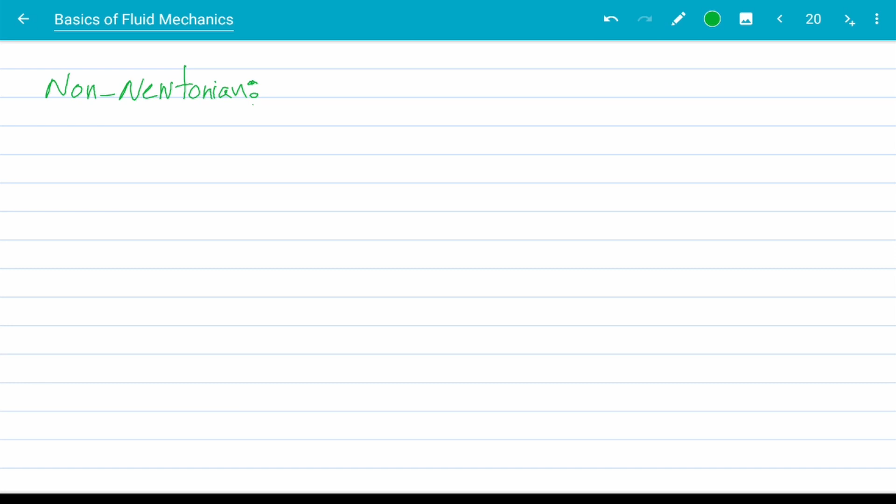The reason is that the wet sand is a dilatant fluid, meaning that by increasing the rate of deformation, shear stress increases rapidly. There is another category of non-Newtonian fluids, a bit different than pseudoplastics and dilatant fluids, called Bingham plastics. They behave like solids under shear stress for a certain duration, until the amount of shear stress reaches the yield stress of their solid phase. After that, they collapse into a fluid state and behave like a Newtonian fluid.

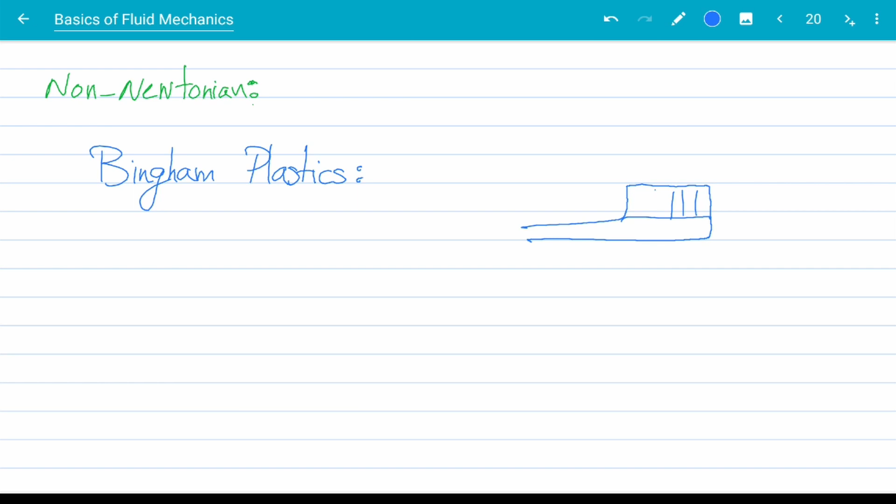A very common example of a Bingham plastic is the toothpaste we use every day. When you put the toothpaste on your brush, it stays there like a cylindrical shape, just like a solid. It doesn't fall like a liquid. If you put water on your toothbrush, it will not stand there, it will just flow away. The toothpaste, however, stays there just like a solid.

But when you start to move your toothbrush against your teeth, the toothpaste becomes a liquid and starts to behave just like a liquid. The reason is that the moment you start to move your toothbrush against your teeth, you are applying shear stress onto the toothpaste. It can withstand some shear stress, but the amount of pressure you apply is greater than its yield stress, so it breaks down into a fluid state and behaves like a fluid.

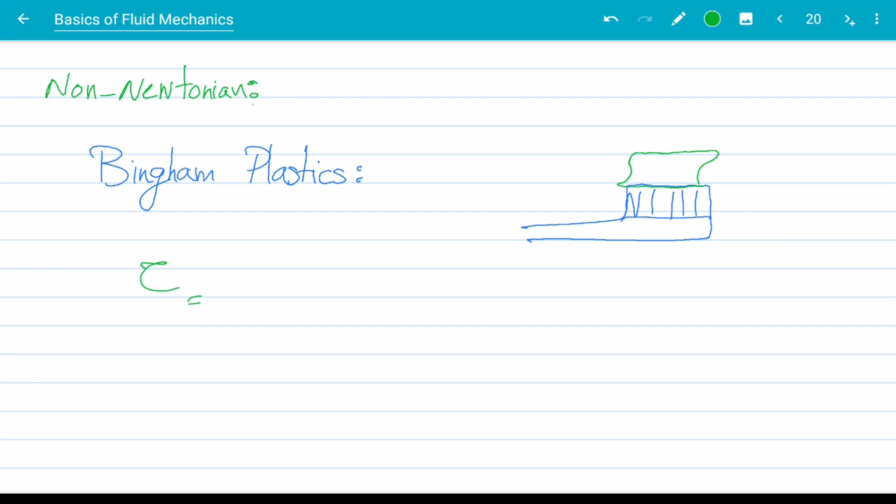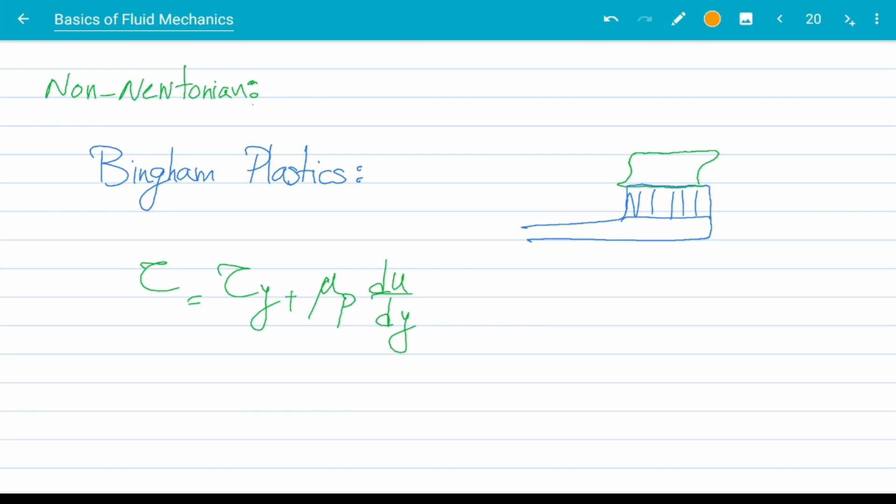So the equation for a Bingham plastic looks like this: tau, the shear stress, is equal to tau y plus mu p times du over dy. In this equation, tau is the shear stress, tau y is the yield stress for its solid state, mu p is the plastic viscosity, and du over dy is the rate of deformation. Please note that when the Bingham plastic goes into the fluid state, when shear stress is greater than the yield stress, the shear stress changes linearly with the rate of deformation. So after you conquer the yield stress of this Bingham plastic, it behaves just like a Newtonian fluid.

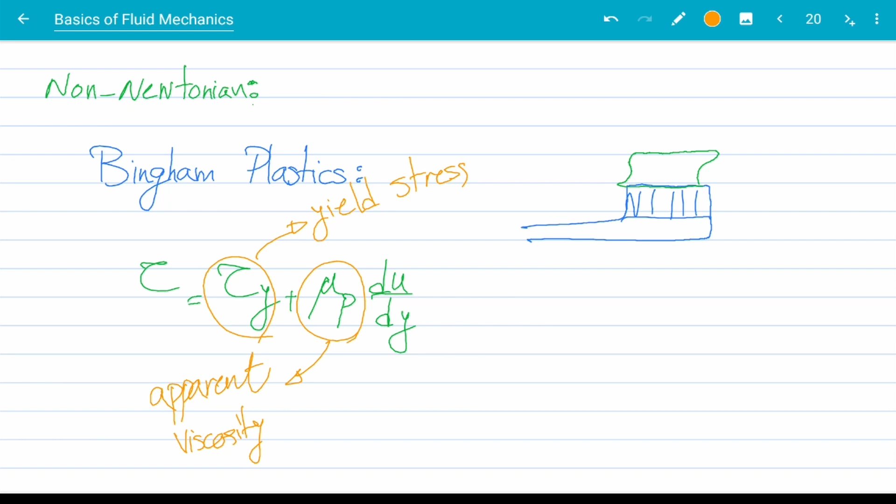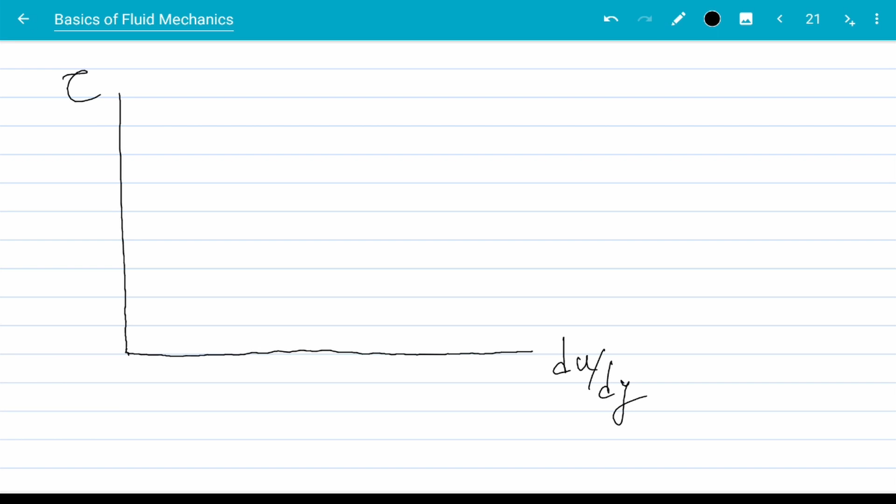If I want to show these fluids on the same chart, I have something like this. This axis is tau, the shear stress. This axis is du over dy, the rate of deformation. Newtonian fluids look like this green line, a linear relation between shear stress and the rate of deformation. Bingham plastics follow this orange line, where this is tau y, or the yield stress.

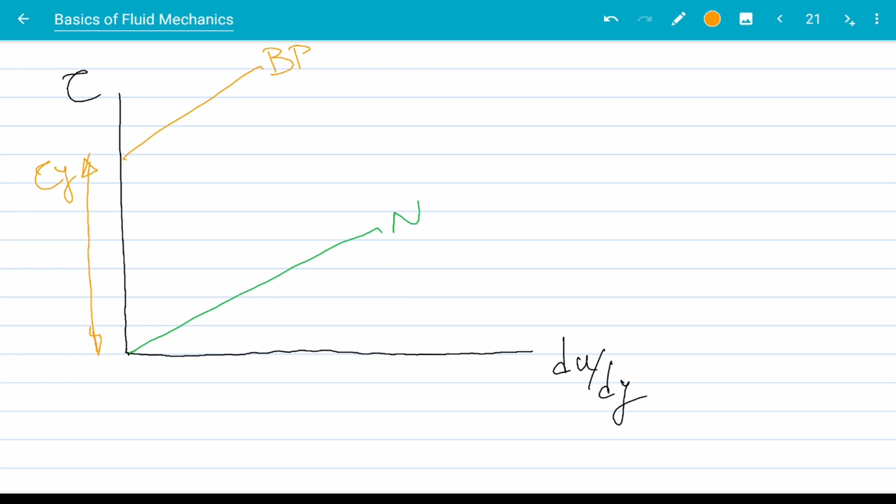Now I have pseudoplastic and dilatant fluids to show on this graph as well. Pseudoplastics follow this blue line, where after reaching a certain value for the rate of deformation, if you increase further, the shear stress relatively doesn't change. As you can see, the tangent of this blue line approaches zero, meaning that for very large rates of deformation, the shear stress is not going to change much. Finally, the dilatant fluids follow the red line, where apparent viscosity increases with the rate of deformation, meaning that at larger values of rate of deformation, we experience higher shear stress inside the fluid.